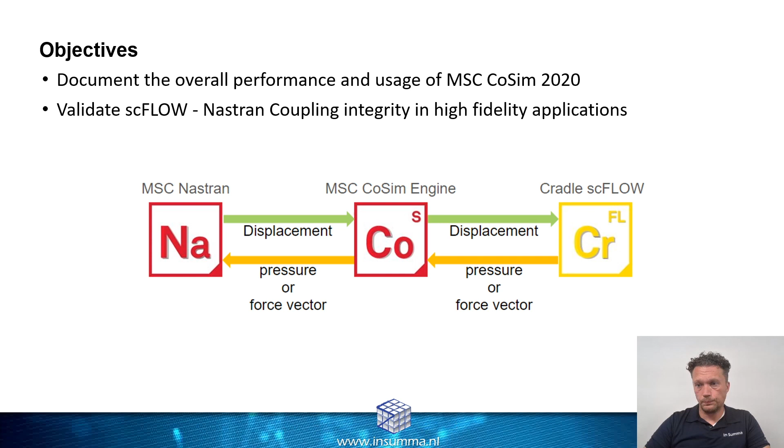The high fidelity application we selected for this investigation was a winglet. The primary goal for a wingtip device like a winglet is to minimize induced drag. Wings have a natural pressure imbalance by which they generate lift. A consequence of the imbalance is the tendency for the flow to curl around the tips of the wing, generating wingtip vortices. These vortices drag local stagnant air into the vortex, creating downwash. The downwash at the wingtips causes the local angle of attack to increase at the tip. The increased local angle of attack is what generates induced drag.

Wingtip devices work by redistributing the vortex around the winglet away from the wingtip. The wingtip devices introduce secondary vortices along the trailing edge that dissipate energy from the main vortex, reducing main vortex intensity and rotation speed. Notice the reduction in intensity of the wingtip vortices in the figure below. This is for a situation with a winglet, where the color red indicates the intensity. The more red it is, the more vortices are present. Here in the case of a winglet, you see, well, it's almost pink. In this case, where there is no wingtip device present, you see very red indications here on the wingtip.

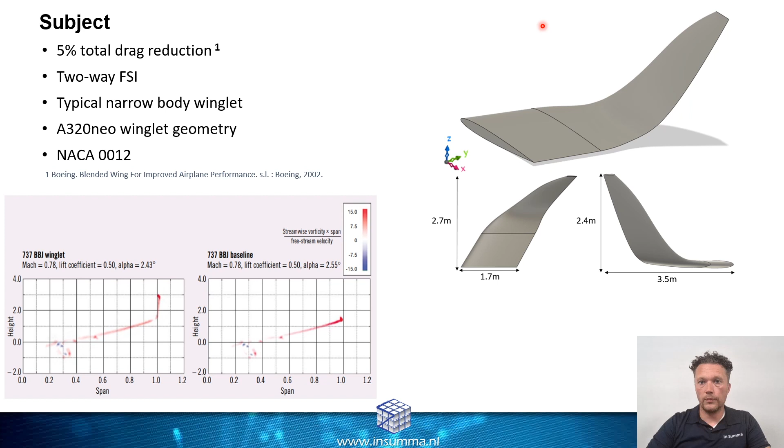When I entered this study, I was actually not aware of so many winglet types. You see 4 types over here. Maybe there are more, but these are 4 we identified. The wingtip fence, mainly in use with Airbus on the A300, A310, A320. It actually acts really as a fence blocking the vortices.

You have the canted winglet. That's a winglet that has been in use for quite some time actually. It was introduced on the 747-400 in the 1980s. Well, maybe over here you already see the A350, which is one of the types that Airbus is producing. It's a blended winglet, so it's actually a very nice shape transferring from the wing into the winglet. And a split tip winglet, where you basically have a combination of a canted winglet with a smaller winglet here below.

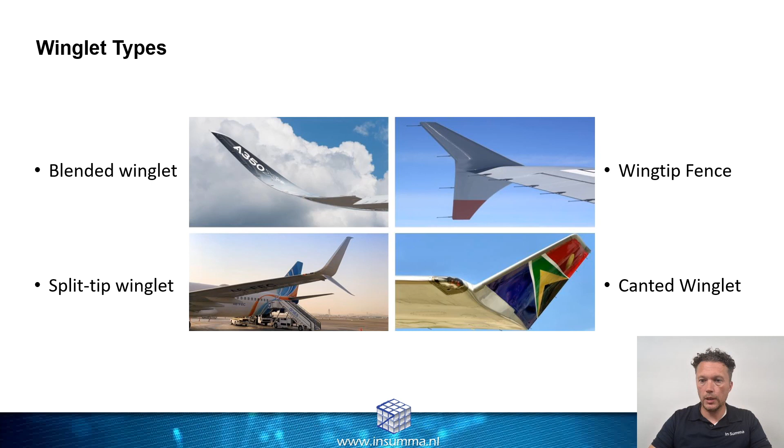The research was conducted with several boundary conditions, several conditions actually. The takeoff condition was created due to the prevalence of induced drag at takeoff and climb out. When looking at the figure, it can be seen that the majority of the total drag during takeoff is generated by induced drag. An increased understanding of the structural deflections can result in design optimization. The boundary conditions are defined from an A320, taking off at maximum takeoff weight at sea level.

The rotation speed was retrieved from an A320 flight training manual and placed at 156 knots or 80 meters per second. During the rotation, 5 alpha was assumed as rotation angle for the aircraft. Further variables such as density, dynamic viscosity, temperature were retrieved using the International Standard Atmosphere at mean sea level.

The other condition, the cruise condition, was considered due to the time spent in this phase of the flight profile. Depending on the flight distance, up to 86% of the total flight time is devoted to cruise. The expected advantage for the two-way analysis in this condition is the prediction of the Mach shock wave location. After a shock wave, large pressure gradients occur that cause a significant increase in drag. The shock wave locations are based on geometry. Therefore, it was expected that with the two-way analysis, the location will be predicted more accurately.

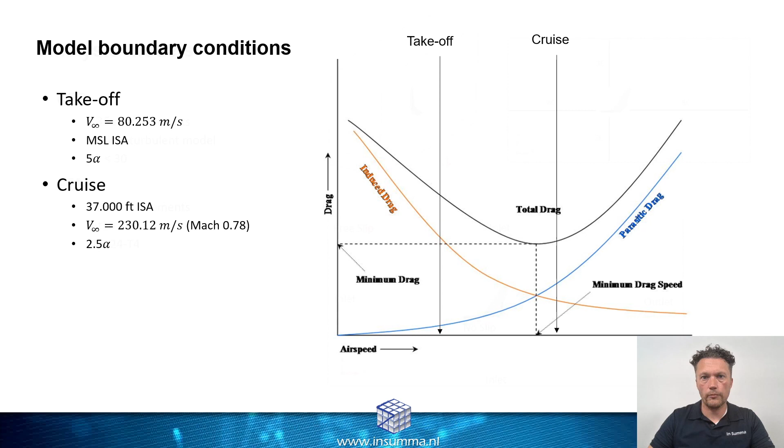So the analysis models we used for both one-way analysis and two-way analysis. In SCFlow, a flow domain was added around the winglet. Let me turn on the pointer. This is basically the flow domain around the winglet. Here, small, you can see the winglet. The domain will function as a fluid region and was sized based on the chord length of the winglet. As found in a validation study we've performed, it was recommended to have at least 15 times the chord before and 20 times the chord after the winglet.

However, due to the size of the root chord being roughly 1.7 meters, it was decided to reduce this flow region to 6 times the chord in front and 8 times the chord behind the winglet, as calculation times significantly increased. The effects of reducing the flow domain become significant above 6 alpha. So because the conditions do not go above 5 alpha, the negative effects are minimal and deemed acceptable for this study.

The root of the winglet was placed to the wall of the fluid domain, and placing the winglet to the wall eliminated shear flow over the root of the winglet. This is important as the winglet was clamped on this location in the FE model.

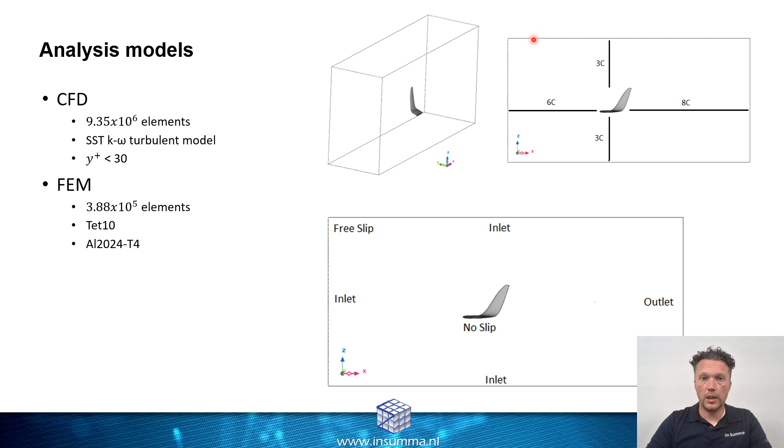As a baseline, the force in the X, Y, and Z direction were calculated by SCFlow. With the use of scConverter, these pressures were mapped to the Nastran mesh. The mapped Nastran mesh was subsequently analyzed using linear structural analysis, providing the resultant X, Y, and Z forces of the structural model. By comparing the SCFlow resultant forces to the structural resultant forces, the force losses can be quantified.

The one-way analysis was performed using scConverter. scConverter is a tool developed by Cradle and is part of the scFLOW package. The tool can be used to map properties such as temperatures and pressures from the scFLOW result files onto different structural meshes generated by MSC Nastran, Abaqus or I-DEAS. The process can be seen over here. Input for the scConverter is the Nastran bulk data file and the scFLOW output file, mapping the pressures onto the Nastran BDF, creating a mapped Nastran BDF, which can be run in the solver.

For the two-way analysis, the CoSim engine uses weak coupling to analyze structural and fluid dynamics. This means that both the Nastran and the scFLOW solver are running when the CoSim is active. The CoSim engine acts as a bridge connecting the two analysis methods. The interactions between the different software applications can be seen in the figure below. With the 2020 release of the CoSim engine, a GUI is provided to start and monitor the progress of the two-way analysis.

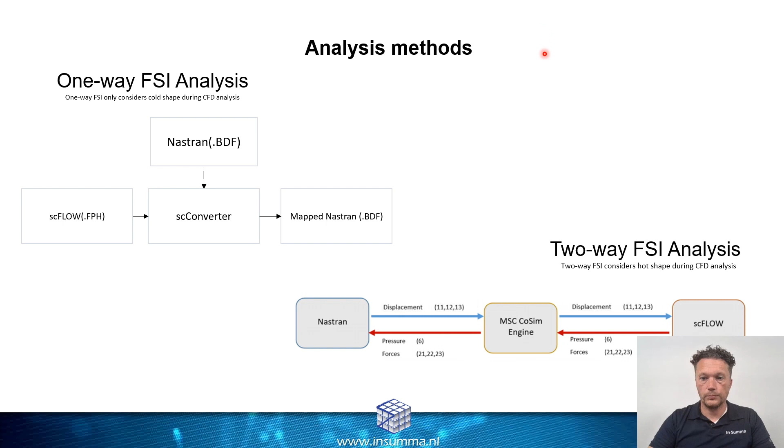During the one-way analysis, the start of the two-way analysis was used as a reference point. The pressures found at the start were mapped to the structure and analyzed using SOL 101, linear structural analysis. For the two-way analysis, the comparison was made when the maximum deflection was reached. In this way, the maximum aerodynamic impact of the deflections can be quantified. To find the maximum deflection, the two-way analysis was run for 150 iterations over 1.5 seconds. With the use of the Nastran STS file, the maximum deflection was found for each condition.

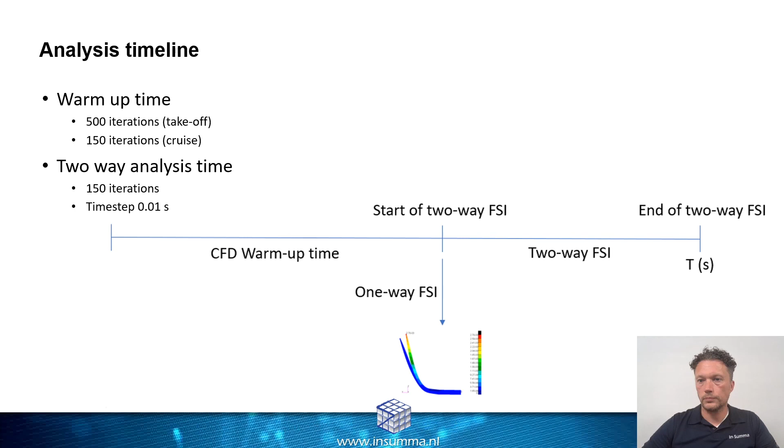After doing the analysis, we can compare the one-way to two-way performance. As mentioned, the one-way analysis has been performed using scConverter as a built-in tool with scFLOW. Over here you can see the pressure and the shear stresses in all directions, the scFLOW results and the Nastran results. What can clearly be seen is that we have some deviations between Nastran and scFLOW. What we found was that with the mapping in scConverter, the wall shear stress is not considered. As the X direction is the flight direction, causing the biggest difference in wall shear stress, we also saw the biggest deviation. Span-wise, we saw an over-prediction of about 6%, which we can actually not clearly identify.

Within CoSim, it can clearly be seen that the results match perfectly. This is a result of the wall shear stress being considered during mapping. It's a force vector mapping, also being able to transfer the in-plane force vectors. The mapping accuracy is to within 100%, so it's identical. A disadvantage, however, is that your CPU time will increase. In our case, it increased threefold.

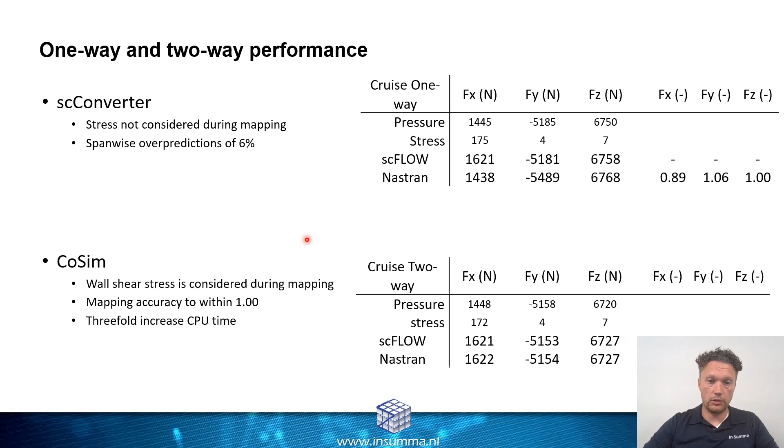What we also did was the mapping performance with respect to Nastran mesh density. In this case, we only looked at force vector mapping, so not just pressure mapping. scFLOW mesh was kept consistent, and the results that you can see over here is that there is near perfect mapping.

We used three mesh densities with increasing number of elements. Mesh 3 is in the end the mesh we used, but to identify if we could decrease the number of elements, we did a performance study on the mesh density. Over here you can see the comparison of the results, and already for mesh 2 we are within perfect agreement of results.

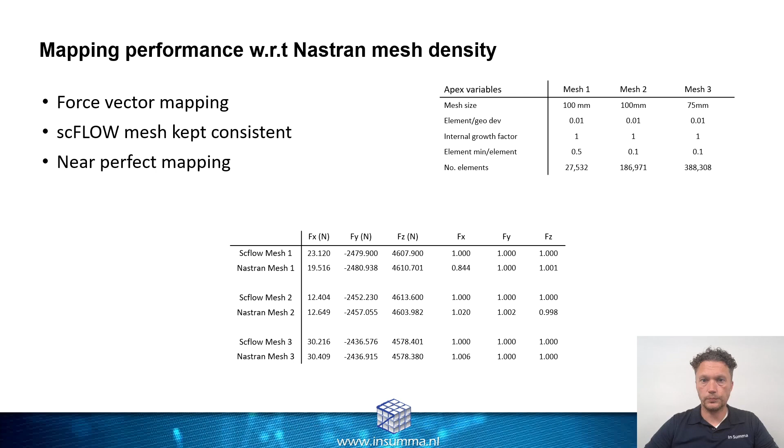So now the conclusion of the two conditions. Remember that we looked at two conditions: the takeoff conditions being very heavily involved with induced drag during takeoff and climb. What you actually can see as a comparison between the one-way and the two-way analysis is that there is a delayed pressure peak. The change in the drag coefficient and the lift coefficient is, however, minimal.

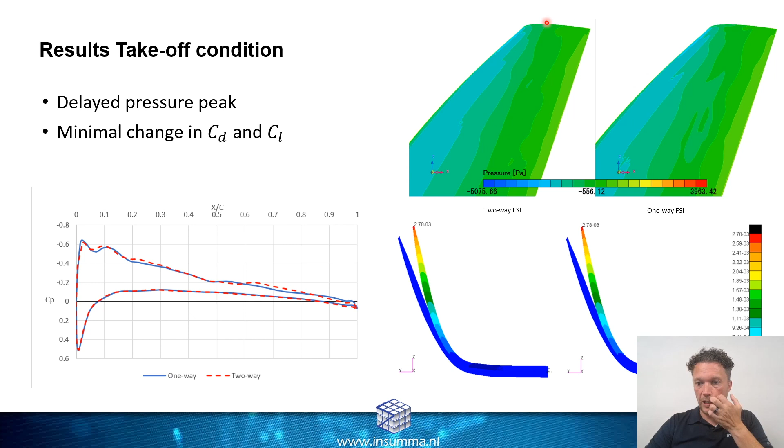The maximum wingtip deflection was found after 75 iterations at 2.78 millimeters. The difference between the maximum and the minimum deflection were about 0.02 millimeters, which gave us the idea that we've reached a very good steady state.

The pressure contours in the two-way analysis closely match the pressure contours found in the one-way analysis, and the deflections are barely affected by the contours at the wing and the base of the winglet. Nonetheless, effects were seen higher up near the tip of the winglet as pressure increased slightly at the quarter chord, which is around this location. The overall effect of the deflections on the aerodynamic behavior was small. Differences between the one-way and the two-way analysis were minimal when looking at the pressure contours.

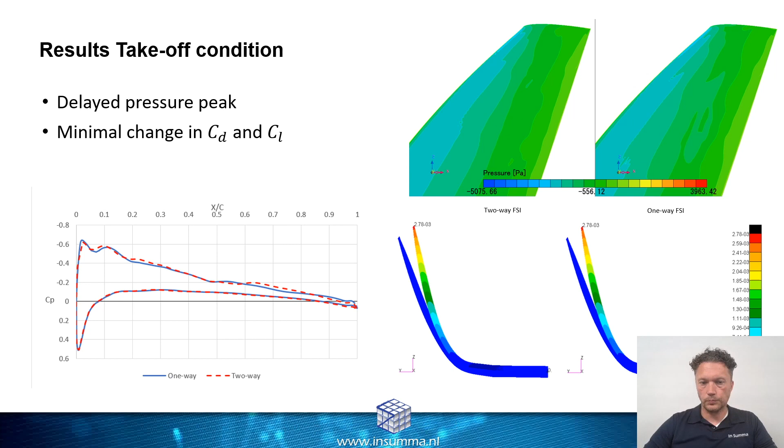The other investigated condition was the cruise condition. During the two-way cruise analysis, the maximum wingtip deflection was found at nearly 5 millimeters after 200 iterations. The minimum deflection was found at 4.98 millimeters at iteration 265.

In the left figure, a small increase of the local Mach number is visible over here. The numerical increase was 0.015, so it's not a lot, but you can see some difference between the two. Both areas were already supersonic, both in the one-way analysis and in the two-way analysis. The differences are negligible and have a minimal impact on the overall behavior of the winglet, as can be seen over here for the one-way and two-way analysis of the pressure coefficient distribution.

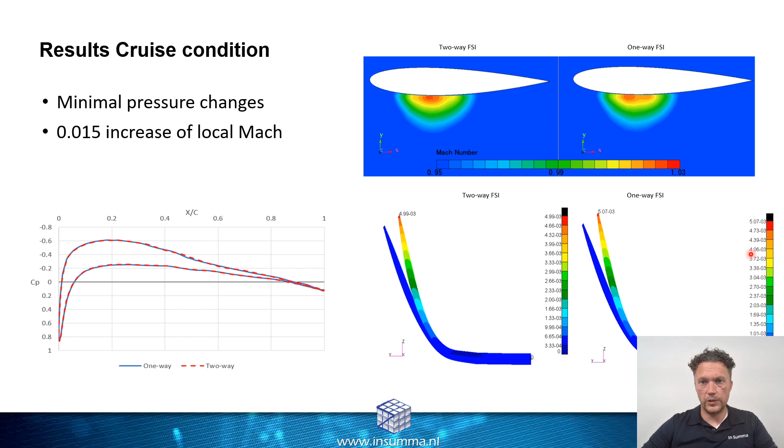So, conclusions for this part of the research. The research is continuing on, but so far we can conclude that the two-way analysis has shown that the MSC CoSim engine can handle complex geometry of the winglet. The superior mapping performance of the CoSim engine has been proven, and furthermore, the accuracy of the simulation was increased by considering skin friction during the mapping process. Computational time compared to the one-way analysis is higher, quite substantially higher, obviously.

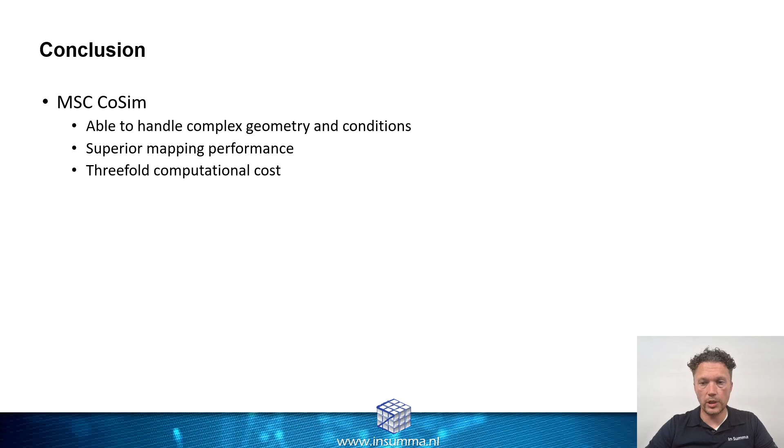This research has provided insight into the setup of two-way analysis using the MSC CoSim engine. Results show that the engine can perform aeroelastic analysis on complex geometrical shapes and high accuracy models. The superior mapping performance of the CoSim engine has been proven and is something that we will surely continue on using. Improvements can be made on the user experience, as the user guide was limited for this edition.

Future work for these investigations is obviously modeling the internal wing structure. What we've done so far, also for reducing the complexity of the calculations, was have a solid winglet. In real life, obviously, you will not have a solid winglet, but an internal wing structure, which can also have an effect on the deformation and then on the two-way analysis again. But it's a step that we're going to take.

We're also going to do some structural analysis on a winglet. With the release of the CoSim engine 2021, we're going to rerun a few of the analyses in this version. And we're going to do some validation of the other coupling types in CoSim, because CoSim can couple other physical solvers like Adams and Marc as well.

So what's new in the CoSim 2021 engine? New GUIs on the preprocessor side: you have the CoSim Pre-Basic and the CoSim Pre-Plus, giving you all kinds of possibilities to do very good pre-processing for the CoSim run. There is a new CoSim launcher to check your run during the analysis, and there is a new Adams SC/Tetra coupling within MSC 2021.